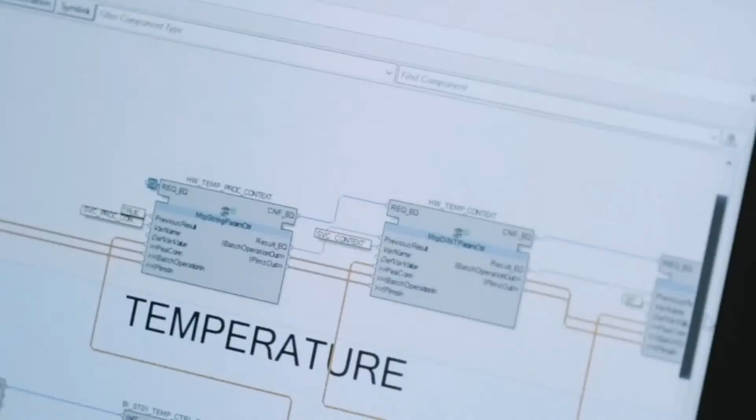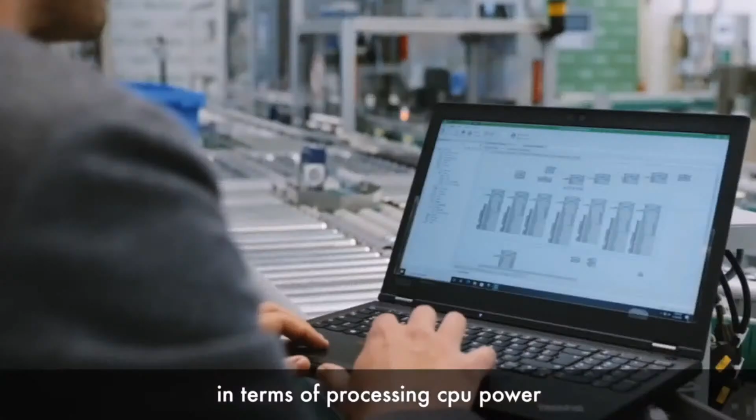universalautomation.org. It's about sharing a technology, a shared runtime execution engine. We call it a game changer in automation because we have one technology which is based on IEC 61499, which is the standard which aims at decoupling hardware and software. Hardware itself is becoming very, very performant in terms of processing and CPU power, and the future is more and more about software. This approach is really a winning approach because it's very, very flexible. You develop the application once and you can reuse it in each different configuration.

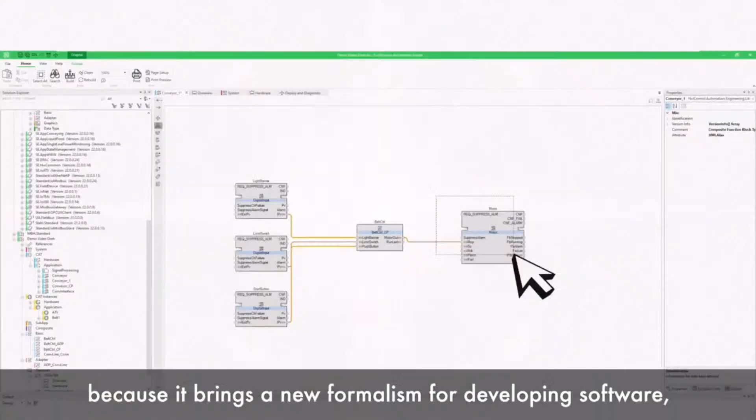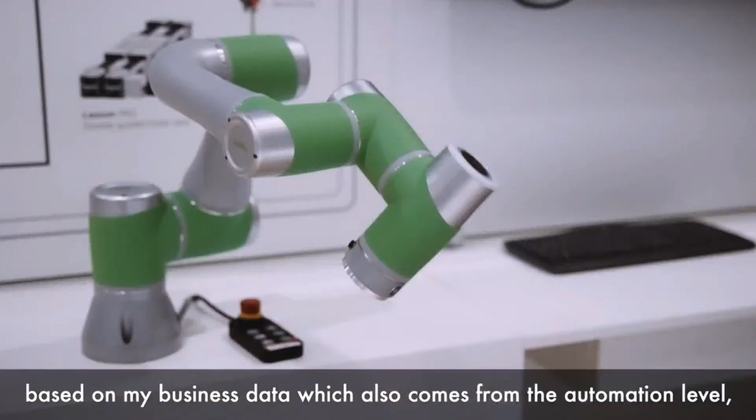That's exactly what Universal Automation and 61499 enables, because it brings a new formalism for developing software, which is object-oriented in nature and which allows deployment over distributed hardware for the actual final control system. So let's say that it's a marriage made in heaven. So if I want to make more conscious decisions based on my business data, which also come from the automation level, I need universal automation to get this data in an efficient way and with the right engineering efforts on the level where I can run the analytics.

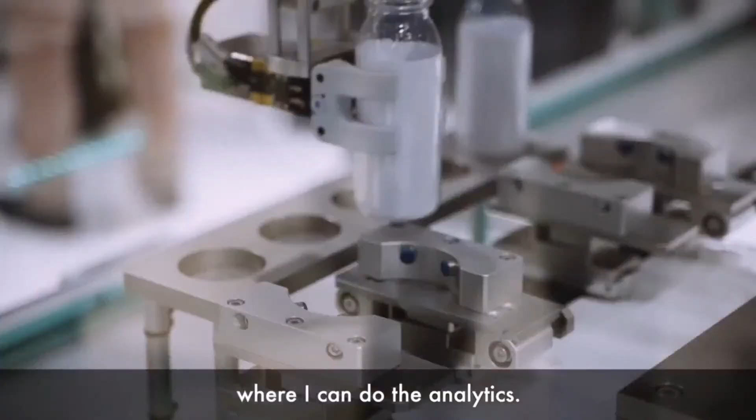Offers are available, not just from Schneider Electric with EcoStruxure Automation Expert, but also from Advantech, from Stahl, from ESA in Italy, and from other companies. Advantech is growing really, really fast. And I believe if you want to keep on growing in the near future, you need to be able to innovate. And when I see the universal automation approach, it is exactly the way of innovation we need to go with.

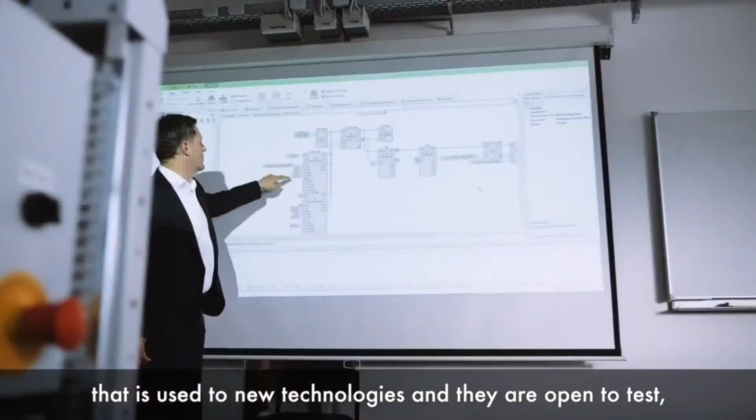Most of our customers from process automation are pretty conservative, so never change a running system. But now we see a new generation coming up, which is used to new technologies, and they are open to test, to try these new functionalities. And I think most of them pretty well understand the advantages of this.

I'm doing this now for 20 years, and I think over the years, this is the most exciting change. And from my experience, I see that in IT, for example, there has been a big revolution. And I expect the same in automation. I don't know when it will happen. Probably it takes a little bit of time, but probably a revolution will come.

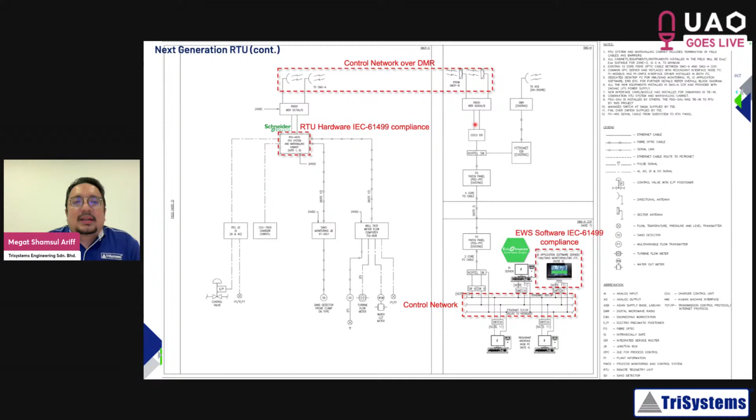The control network goes by radio link to the control DMR, which goes to the mother platform. And then we have converted it to fiber optic, and the fiber optic here will go to the control room. The CCR is in the LQ, the living quarters. And this control network will be connected to our new EWS, which we're going to put together with the IEC 61499 compliant software, EcoStruxure Automation Expert.

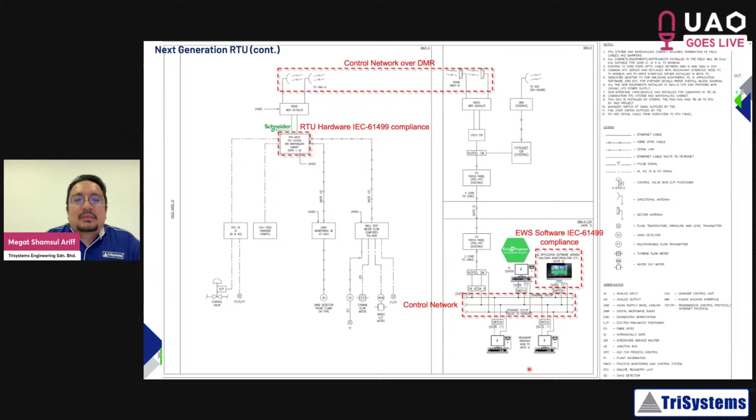From these 7 platforms, we only upgrade 1. So probably the plan is maybe 3, 4 or 5 years to upgrade all these 7 platforms. Currently these platforms are running on the old protocol, DNP3. So now we have a mix of OPC UA and the DNP3 protocol, which is fine. We have tested it. It works.

For the start, only 1 platform will have 61499 with OPC UA, and we also need to add the connectivity to the PI system, the AVEVA PI system, at this platform. Currently it is using the DNP3 PI interface. Now we need to add the OPC UA connector to this PI server so that we can get the data, but also do control as well. So we send the set point from this PI server back to the platform, and the platform control system will open the valve for the gas injection.

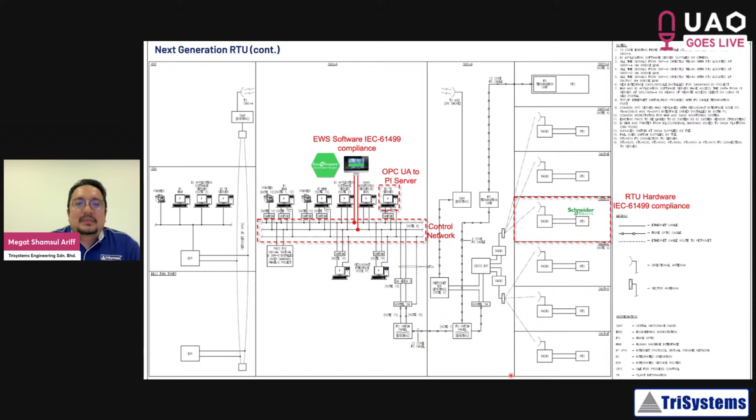So just a bit on the local storage that we put in: it's running as a lightweight storage system. It's the AVEVA Edge Data Store. We are going to use OPC UA, and it will be connected to the PI server. And this is very lightweight. We'll be putting in Moxa hardware running on Linux, I think 11, with an ARM processor. So in short, this is our use case.

I'll be happy to take any questions from the floor.

Good. Let me have a look if we have any questions for now. I don't see chat coming, but one question from myself is that I see that the whole system that you have is very distributed. How do you see that the technology, especially 61499, has helped you towards this modeling of your application?

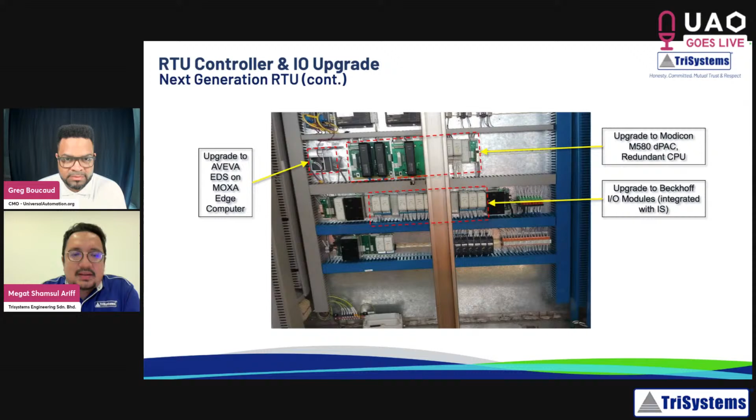Yeah, so the IEC standard would help us in case of, let's say, so the problem statement here, sorry, let me get back to this now. The problem statement here is that we need to support the lifespan of the system to tackle the obsolescence issue, right? So IEC 61499 is, I think, the answer, because it doesn't have to be specific to what hardware we use. And probably this is something that we will ask: in case, let's say, we don't get this dPAC M580 anymore, can I put another hardware from Stahl or Phoenix Contact? Yeah, it can be, because the hardware doesn't matter, as long as it's certified to IEC 61499.

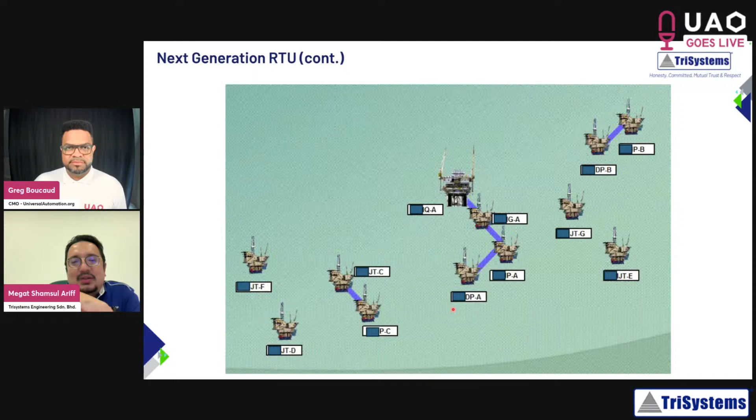Yeah. So, if you see here, we have many platforms, and as long as all the hardware is certified, it doesn't matter. This platform can be using hardware from vendor A, this one vendor B, and vendor C. It doesn't matter. It will work. It definitely will work, and the application doesn't change. So I guess this is something that the customer wants. The customer wants the system to be robust and they don't have to spend more money when some hardware becomes obsolete.

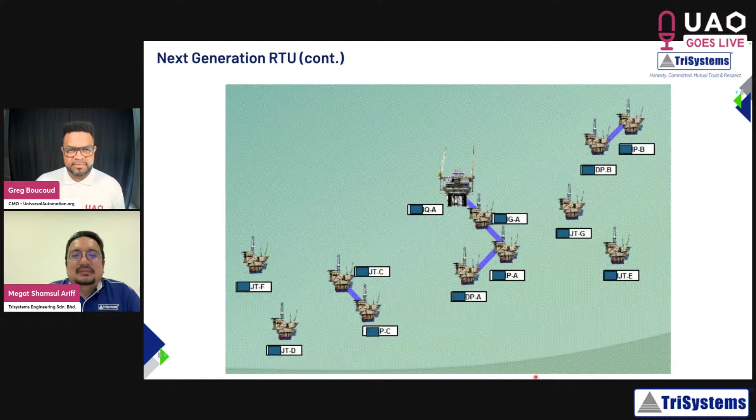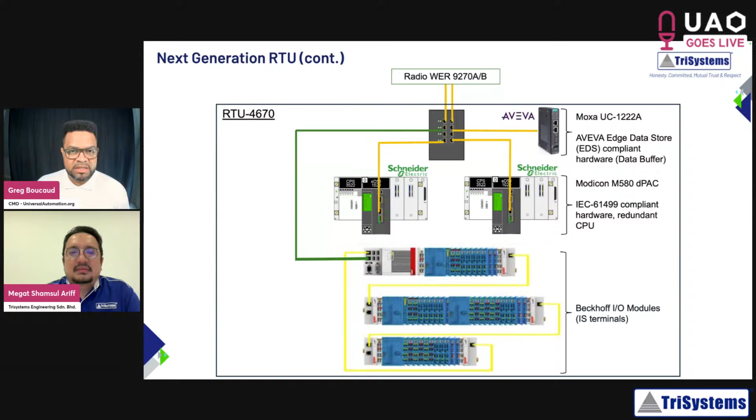Yes, so really this hardware and software independence helps in terms of resilience of supply of product on one side, and on the other side to push away the risk of end of life as we know it today, if I can summarize it. Yeah, that's very good, and that's what we at universalautomation.org are pushing as values for the technology that we are supplying. So it's great to see that the customer, the one using the technology, is also seeing that.

I am switching to another question, which is coming from LinkedIn, from Mudassir. Are there any bottlenecks or shortcomings of 61499? Where can it be improved? Do you have any feedback on that? So yeah, one thing when I presented this to Schneider: this hardware here is not a redundant product. This dPAC M580 is just a single unit, but for this platform it's critical to have a redundant unit because it's far and not easy to get to, so we need to put in a redundant system. I'm sure in the future they will come up with this redundancy. But currently we are doing an engineered redundancy from our engineering, and we already tested it and demoed it to our customer. It works. If one controller fails, the other controller will take over, but it requires some unique integration that we do.

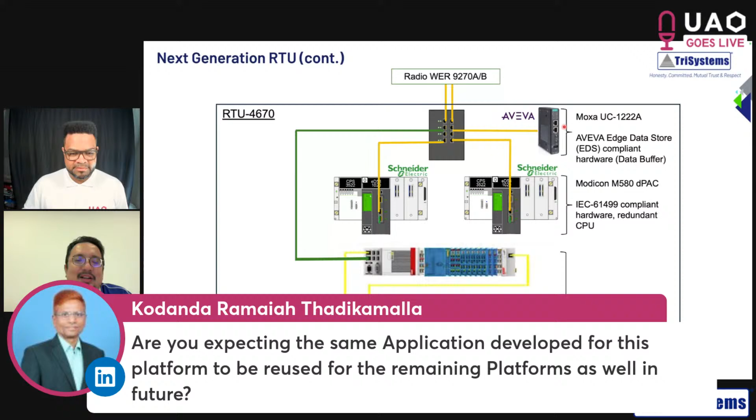Good. I see we have another question coming from LinkedIn, from Kodanda. Are you expecting the same application developed for this platform to be reused for the remaining platforms as well in the future? Yes, because the application is similar. As mentioned, it's for what they call the EOR application. Not much change. The only thing that is fixed is the wellhead, and the sensors are the same sensors. The application, if we do one, will be similar for other locations as well.

Yeah. And we can deploy it without going to the offshore platform. Let me just put back your presentation so we see the architecture. You have this engineering workstation here, and we can deploy to all the other 6 platforms without having to go there. We can do the engineering and deploy it via the telecommunication link, and it's done. So we see here even an application using wireless telecommunication in between. That's very impressive.

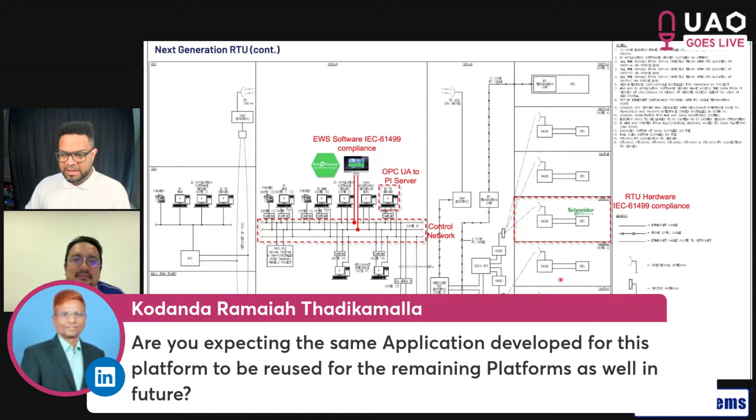Good. I see no other questions for now. So maybe one last question to you, Megat. We have seen for this application you have used Schneider Electric, with the redundancy that you did yourself and so on. But in general, what would you say to all the technology vendors out there which are looking for their next generation of product and maybe of automation as well? Do you have something that you want to tell them?

Yes. Regarding the association? So basically, we are a system integrator. We build systems for customers. Our customer is the end user that uses us for an application. As a system integrator, we look for the best solution, and sometimes there are specific requirements coming from the customer that we need to think about, and we need to look at what technology is available in the market. As a system integrator, we are responsible. The sole responsibility of deploying the system to the customer is ours. This is the beauty of IEC 61499, because IEC 61499 is very centric to the system integrator, which we like.